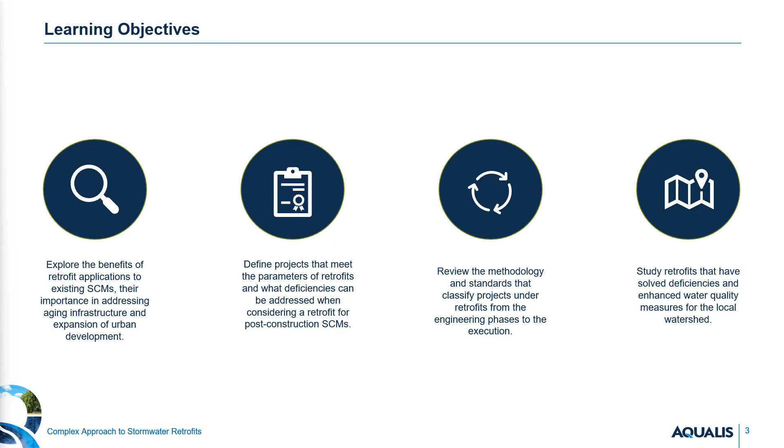Next, we will define projects that meet the parameters of retrofits, as well as what deficiencies can be addressed when considering a retrofit of post-construction stormwater control measures. We will then review the methodology and standards that classify the projects under retrofits, from the design and engineering phases to the execution of the retrofit. And lastly, we will look at real-world case studies of retrofits that have solved deficiencies and enhanced water quality measures for the local watershed.

Before we start into the basics of retrofit, I would like to discuss the distinction between stormwater repair, rehabilitation, and retrofits, as well as preventative maintenance. Therefore, we will start by reviewing key repair and rehabilitation concepts, when they are required, how these differ from a retrofit project, and the expertise needed to enact each phase of the project.

Preventative maintenance is necessary to ensure proper stormwater system functionality, while mitigating the chance that property owners will need to repair or rehab their stormwater system. Routine maintenance will also ensure accessibility and regulatory compliance while meeting water quantity and quality requirements. A full assessment of a system's design should be implemented monthly, quarterly, or annually, depending on regulatory compliance as well as geographical implications.

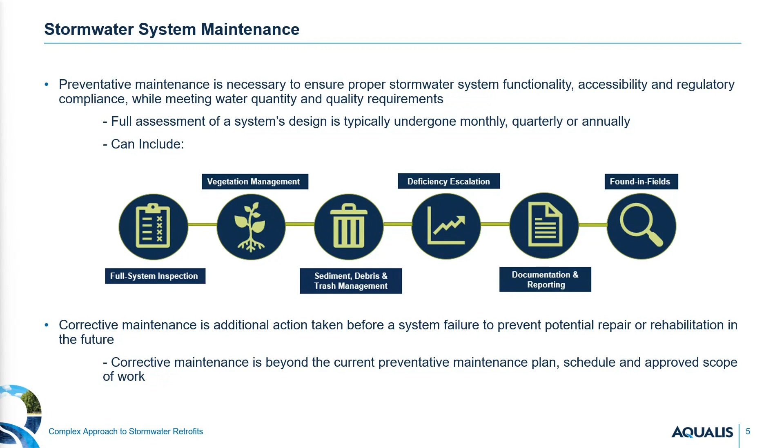Comparably, corrective maintenance is additional action taken before a system failure to prevent potential repair or intensive rehabilitation in the future. This type of maintenance is typically beyond a current system's preventative maintenance plan and will require an out-of-scope proposal to correct the identified deficiencies.

If a stormwater system is not properly maintained, it may require repairs or rehabilitation. A repair is usually due to a localized system failure or issue that requires out-of-scope planning and preparation to rectify. Based on damage severity, aging of the system's infrastructure, and frequency of component or system failure, a cleaning, patching, repavement, or component replacement may take place.

Conversely, a rehabilitation occurs at a system with a large-scale non-compliance issue, deficiency, or failure. A rehabilitation is most often needed when a system lacks proper maintenance over an extended period that results in improper functionality and operational deficiencies. Identifying the need for rehabilitation starts with a system inspection to assess its current state and functionality.

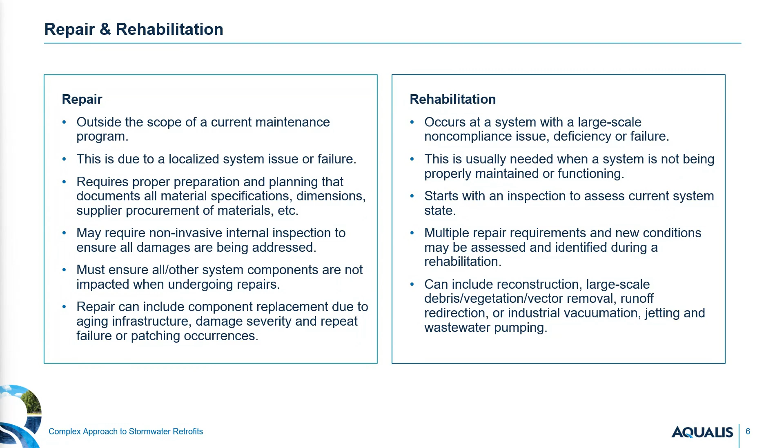During this inspection, multiple repair requirements and new conditions may be assessed. If a rehabilitation is recommended, it can include a large-scale system reconstruction, which consists of debris, vegetation, or vector removal, runoff redirection, or industrial vacuumation, jetting, and wastewater pumping.

Maintenance, as well as repair and rehabilitation, should be a collaborative approach carried out in conjunction with a certified stormwater professional. Professionals understand the engineering, regulatory, and ecological issues impacting stormwater systems and can tailor solutions based on these criteria. In addition, stormwater professionals will work with property owners to create, enact, and ensure a preventative maintenance program that meets the needs of your SCMs and complies with federal, state, and local regulations.

If repairs or rehabilitation are needed, stormwater professionals will utilize a comprehensive and innovative approach to restore and maintain system functionality and uphold O&M agreement protocols.

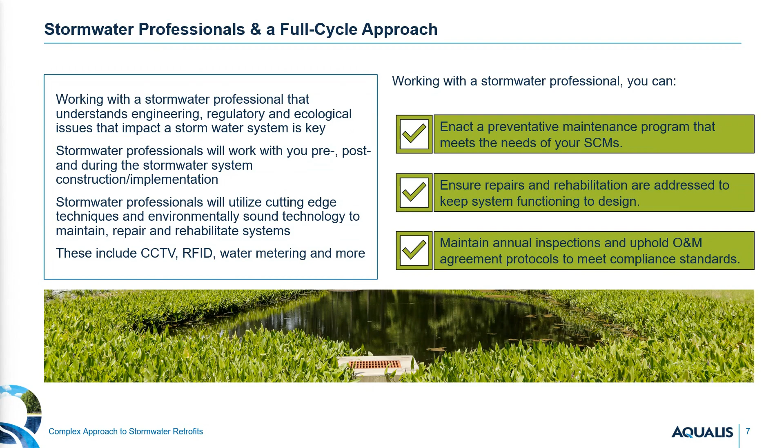Now that we have reviewed the key facets of repair and rehabilitation initiatives for stormwater systems, let's dive into the basics of what a stormwater retrofit is and the phases of retrofit and what impacts these types of projects.

A stormwater retrofit can take two paths: installing stormwater best management practices, or BMPs, in locations where they have not been previously implemented, or small-scale changes or redesigns to a part or parts of a stormwater system are made to allow for the installation of new, optimized water quality, runoff reduction, filtration, or retention capabilities.

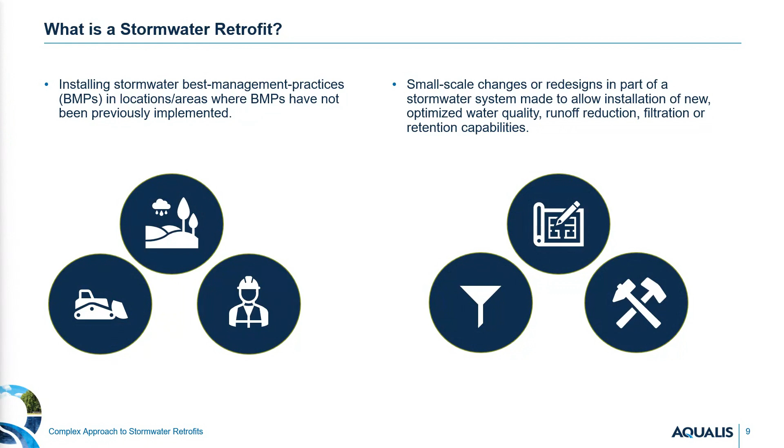Because retrofitting is a completely custom, one-off solution, the project must take into account several key aspects before a project is approved and a new design is implemented. As always, project and material costs play a large role in the extent of the retrofit and what can be accomplished. But geography-specific aspects, such as the availability of land to increase the size of or add the system, coupled with elevation, soil quality, and local terrain, play a large role in what type of retrofit can be achieved.

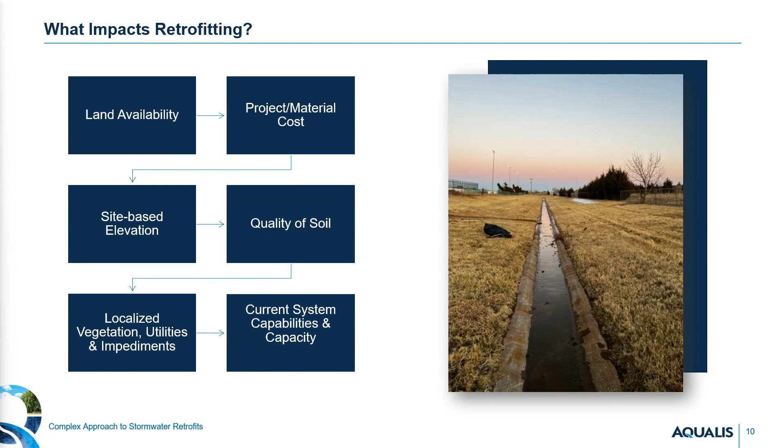To implement a retrofit, a project involves a series of actions necessary to ensure approval, intended functionality, and geographic impact. First, property owners will need to work with engineers to provide system studies that ensure the system's new intended capacity and drawdown meet design function for approval. Second, engineers will produce new, municipally approved plans. Once these plans are approved, a retrofit can be executed.

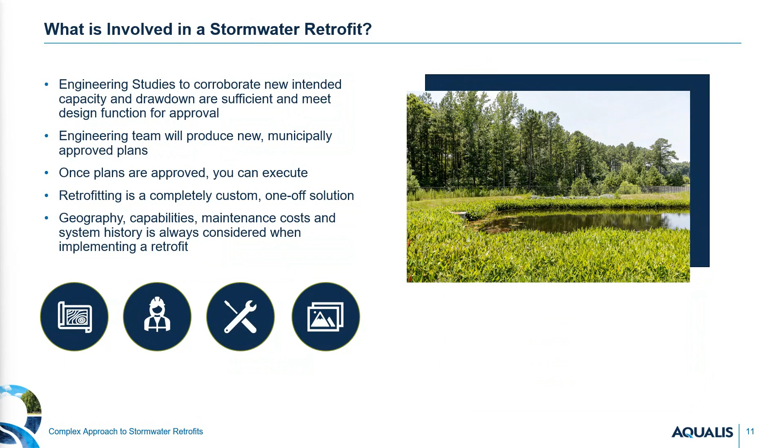In this next section, we will cover key considerations for retrofits, situations in which a retrofit project is necessary for a stormwater system, and real-life case studies where retrofits were implemented.

Retrofitting is commonly utilized to solve or mitigate flooding issues within a watershed. This is due in part to prior design deficiencies built into the original system or degradation in the system's intended performance. Geography factors heavily into the frequency and impact of flooding. Areas that are impervious in nature, such as parking lots and paved roads, cause stormwater to accumulate and run off. This is due to stormwater failing to infiltrate the surface, which results in the displaced water flowing over roads, parking lots, and other impervious infrastructure until it collects and stagnates in a low-lying area.

While the system itself and its location factor in how or why flooding may occur, climate can determine when a system may flood. In warm climates, flooding typically occurs most often during the rainy season, as stormwater runoff accumulates at a greater rate and is displaced. However, we are seeing, due to climate change, the frequency of these increase significantly.

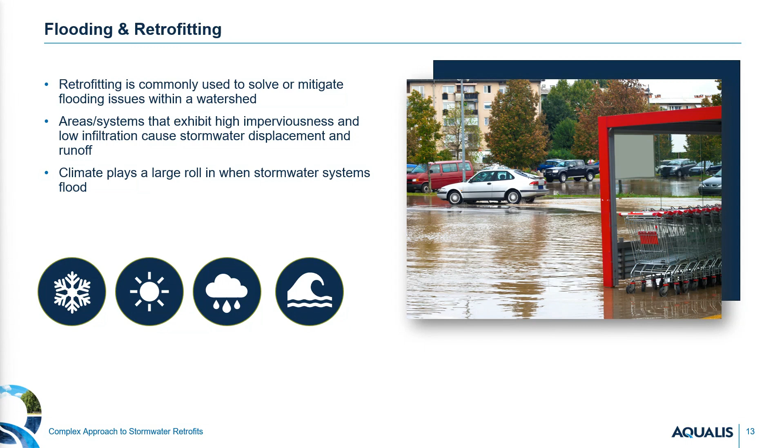In colder climates, flooding frequently follows the spring snowmelt, as temperatures rise and runoff from the mass accumulation of snowmelt flows into nearby drainage systems and bodies of water, overflowing the area. This type of flooding can also include a high concentration of pollutants, sediment, and debris that are harmful for stormwater systems and the surrounding area.

Increases in extreme weather events are prevalent across the nation, including significant flooding in certain geographies. But what are the key impacts it has on the surrounding stormwater assets? For a stormwater system, flooding can result in a number of failures, including clogged catch basins, cracked piping, vegetation destruction, and drainage issues. Infrastructure surrounding the system is also at risk. Structure degradation and cracking can occur, as well as water seepage into surrounding buildings and undesirable locations.

If damaged systems are left too long without repair, dangerous sinkholes can occur due to subsurface erosion of foundational soil and sediment. Sinkholes are a critical safety threat and can lead to irreparable damage and bodily harm to residents and passersby. Safety risks are not exclusive to sinkhole formation either. Flooding itself can create a substantial risk of hydroplaning, car accidents, bodily harm due to falls, breeding of dangerous mold, and electrocution from exposed wires caused by flooding or debris.

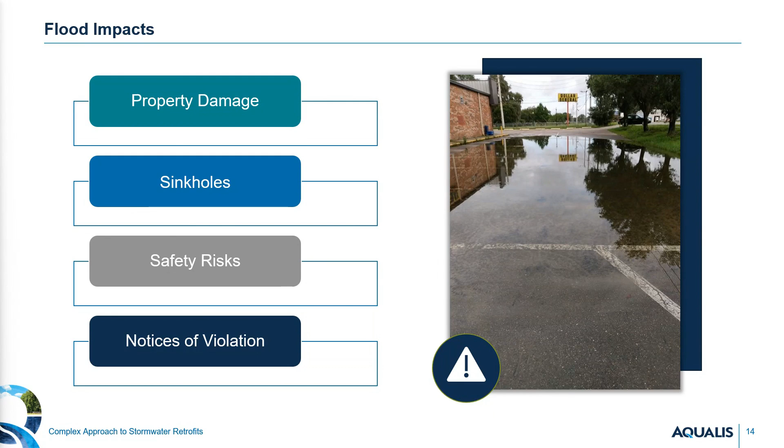Suffice it to say that if a system isn't functioning properly, or there is damage to it or the surrounding area due to flooding, property owners are at risk of receiving a notice of violation, or NOV. These are corrective orders and fines that local municipalities issue to property owners when their system does not meet compliance standards for operation. If a system is non-compliant, it is the responsibility of property owners to take corrective action to repair their system and restore it to compliance. Failure to do so can result in severe fines, sometimes daily, in addition to costly repairs needed to bring the system back to functionality.

Many times, retrofits are necessary to modernize existing systems when the volume of water increases due to growth in an urbanized area, which causes flooding. In Covington, Louisiana, a parking lot owned by a retail chain required a retrofit for this exact reason.

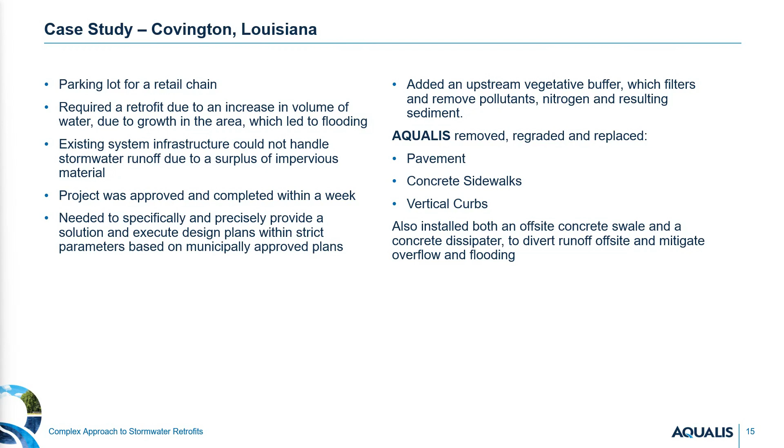A surplus of impervious material and an increase in stormwater runoff led to frequent bouts of flooding, which you can see on the photo in the next slide. AQUALIS provided a precise retrofit solution within strict municipal parameters to remove, replace, and regrade pavement, sidewalks, and curbs. AQUALIS also installed an off-site concrete swale and dissipator to divert runoff, while adding an upstream vegetative buffer.

Mitigating the serious effects of flooding starts with operationally efficient and geographically tailored stormwater system solutions. While stormwater systems are engineered and built to remove water from impervious surfaces and release it downstream, a stormwater system retrofit may be necessary for systems that flood frequently or have inadequate drainage. Retrofitting an existing system involves adding vegetation, porous soils and substrates, permeable pavements, and temporary storage tanks to improve water infiltration and slow stormwater runoff to prevent overflow and stagnant water.

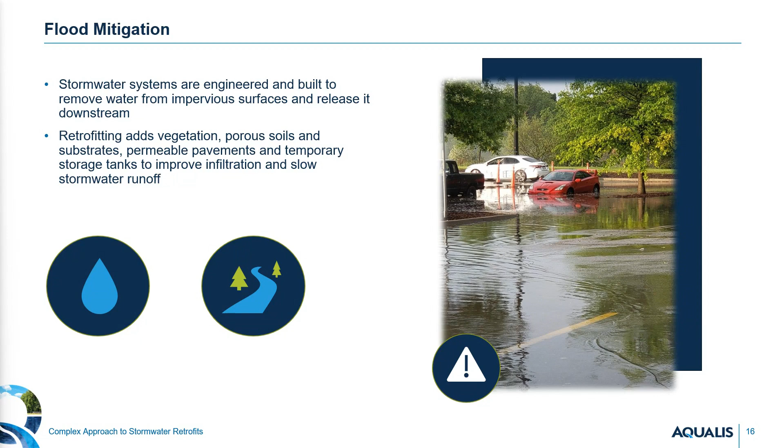Retrofitting can also be invoked to quell the impacts from erosion within and around the stormwater system. Erosion typically occurs in stormwater systems that have insufficient water volume capacity that causes the system to overflow or flood. It also occurs in improperly managed vegetation, leading to poor filtration, and those sites that have a lack of routine maintenance. Erosion can cause a series of cascading and critical impacts for both the system itself and the surrounding locale.

As a result of soil disruption, displacement, and sedimentation caused by erosion, natural landscapes and areas near a compromised stormwater system may experience destabilization, sinkhole formation, or a complete unsightly alteration. Water quality is also heavily impacted, as the presence of erosion is known to bring suspended solids in water, as well as lead to high water turbidity.

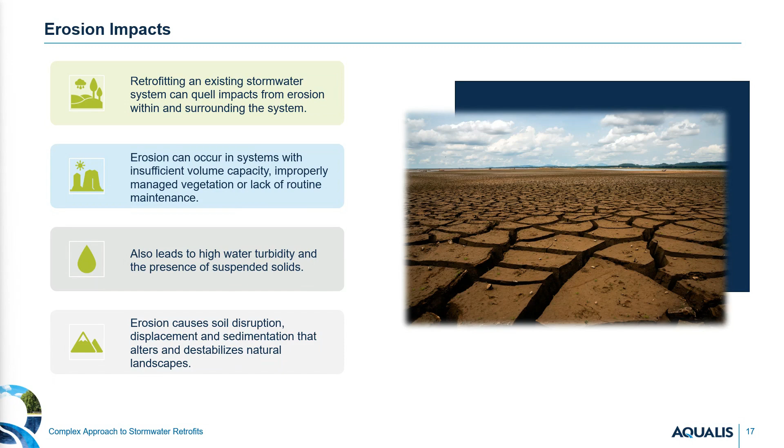The presence of erosion in a stormwater system or surrounding area has a few telltale signs that signal immediate action to property owners. Terrain-wise, the formation of indentations or noticeable paths in which water has broken down soil or sediment is a key indicator that erosion has taken place. Property owners may also observe noticeable soil loss or steep drop-offs. Additionally, property owners may also observe visual changes to water in and around the area. If water is cloudy, hazy, or filled with solids, corrective action will need to be taken.

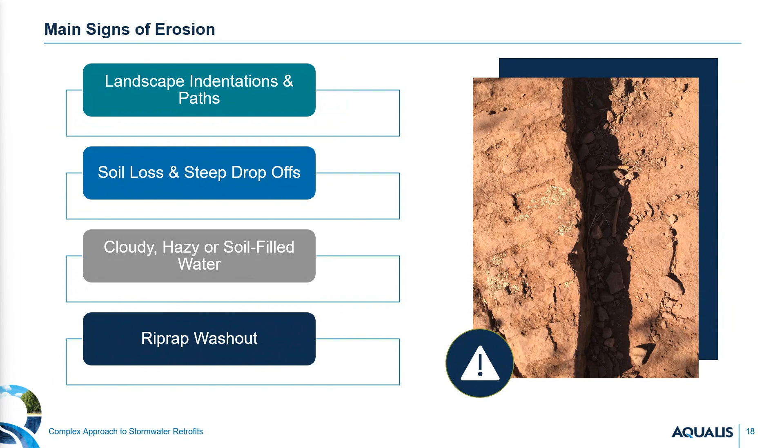A stormwater retrofit to mitigate erosion highlights stabilization, proper filtration, and proper filtration management. A retrofit will typically include adding vegetation, manufactured fabrics, and porous surfaces to slow water movement, promote manageable infiltration, and stabilize soil, which ensures indentation and drop-offs do not occur. When retrofitting and installing control measures, actively planning for a sediment regime and unintended effects of stormwater system functions can go a long way in mitigating channel erosion.

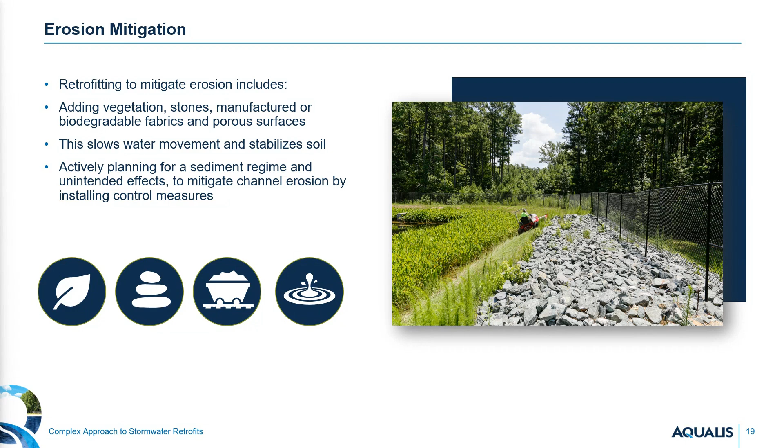If sedimentation is allowed to occur, a retrofit may be necessary to stabilize the stormwater system and restore proper functionality. In Lawrenceville, Georgia, a site owned by a hotel chain was not fully converted nor maintained by the developer. This resulted in sedimentation taking place in the forebay, causing destabilized soil in and surrounding the dry pond. Vegetation was also improperly managed, hindering proper filtration of pollutants and sediment. As beneficial vegetation died out, invasive vegetation took root.

To retrofit the system, restore adequate function, and mitigate increased runoff and sedimentation, AQUALIS conducted an existing site condition survey to confirm the existing design in relation to the original certified design. They then completed a retrofit of the system by removing sediment and installing a new detention orifice to benefit system drainage efficiency. Additionally, they refreshed and installed riprap while dewatering the system.

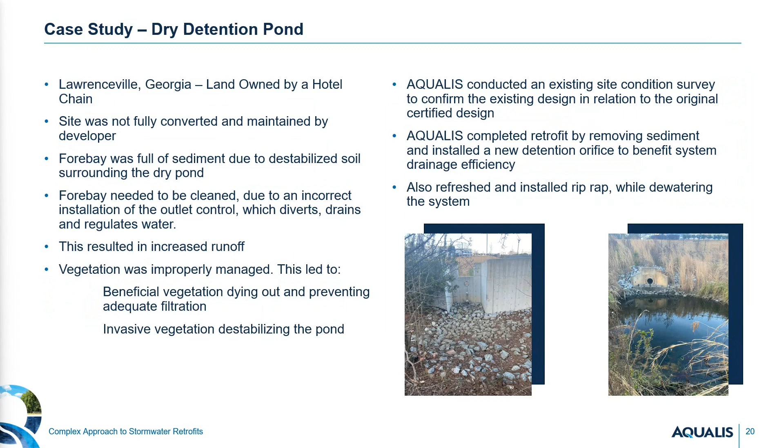When considering retrofitting a stormwater system, it is important to install stormwater control measures that not only mitigate risk and the threat of damages, but also promote sustainability for the surrounding environment. Traditionally, systems were designed to channel stormwater away from properties and infrastructure, with an emphasis on engineered systems built with concrete to achieve this goal. This is known as gray stormwater infrastructure and is exemplified by the use of levees, reservoirs, and stormwater drainage systems.

Recently, however, a more conservational and environmentally sound SCM called green stormwater infrastructure has been coined and added to traditional gray stormwater systems to promote sustainability. Green stormwater infrastructure centers on mimicking natural hydrological processes to retain, transfer, filter, and drain water. To do so, green stormwater infrastructure utilizes and implements vegetation, porous soils and substrates, permeable pavements, and temporary storage tanks.

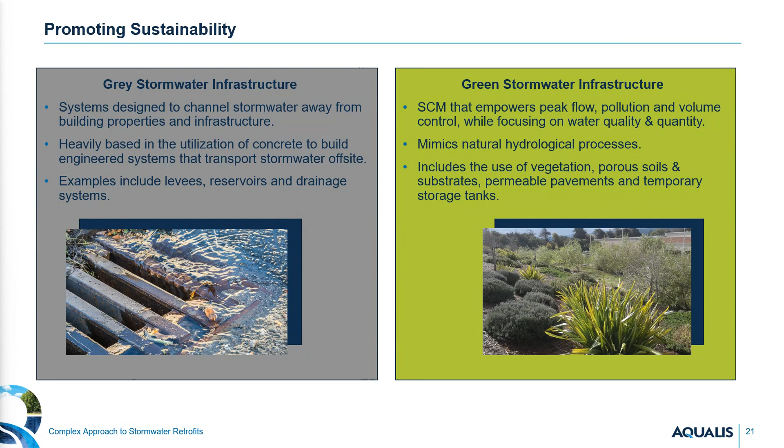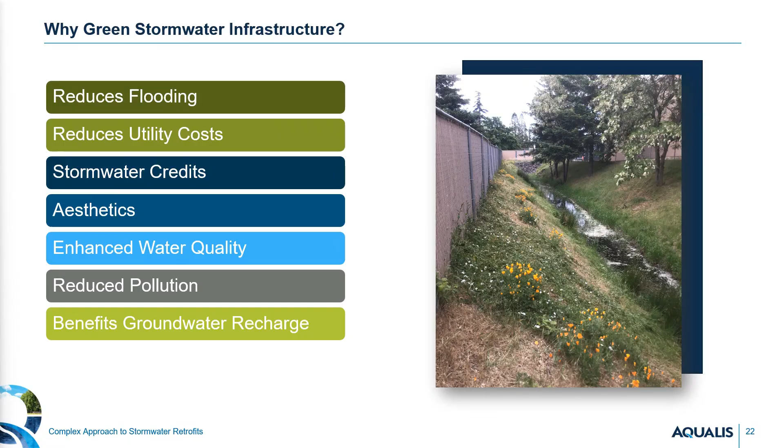Aesthetically, the use of plants and greenery benefits the surrounding area, while making the system more pleasing to the eye. Functionally, these plants help to filter pollutants and sediment from stormwater runoff, enhancing water quality and removing a good amount of pollutant from the locale. In our next section, we're going to be discussing a number of commonly implemented stormwater retrofit projects, use cases, and benefits for property owners.

A simple yet highly effective retrofit deals with swapping out impervious pavement or surfaces with porous options. Impervious pavement prevents water from infiltrating the surface beneath and instead diverts it as runoff through and out of the system. This type of surface or pavement makes up a large percentage of urban infrastructure within the United States, with parking lots and roads largely constructed with impervious material. Porous, otherwise known as pervious pavement, allows water to infiltrate the soil beneath the structure. This helps filter the water naturally and decreases the ability for pollutants to be carried to larger bodies of water as runoff.

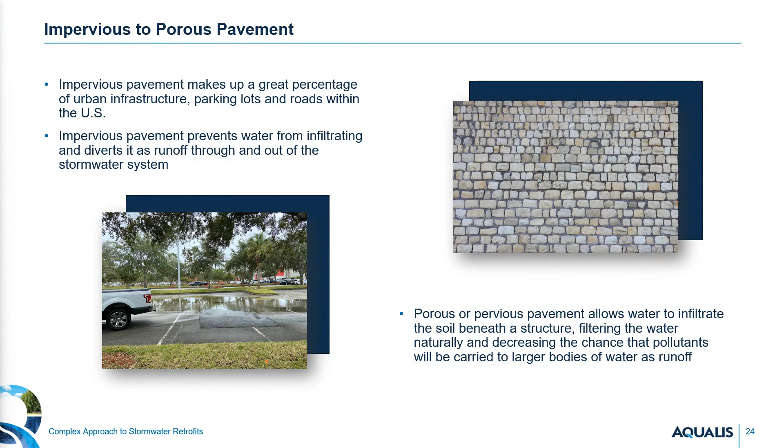While impervious pavement may currently make up the majority of roads and parking lots, it imparts several challenges for property owners and the surrounding area. Due to water being unable to filter into the surface below, this pavement enables standing water that can lead to drainage issues, flooding, system deterioration, and pollution runoff that makes its way into aquifers and seeps into groundwater when displaced. Retrofitting a stormwater system with pervious pavement reduces standing water and prevents common drainage issues. This is due to the pavement enabling water to travel naturally, which allows the water table to recharge and gradually helps water to dissipate and filter through the soil underneath the pavement. This also prevents sediment and pollution runoff.

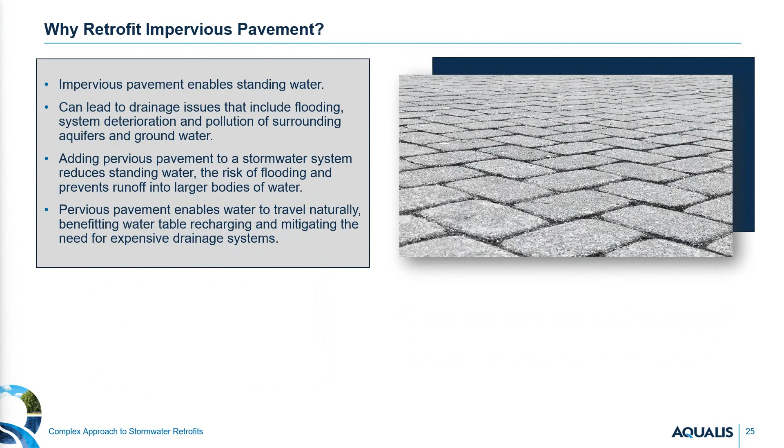In many cases, property owners will seek to convert a dry pond to a wet pond based on past performance and the surrounding terrain. A dry pond is primarily designed to hold and discharge water from rainfall events, but remain dry in between. These ponds will typically hold water for 48 to 72 hours before being discharged. Conversely, a wet pond is designed to hold water permanently while releasing captured water over 2 to 5 days via an outlet structure. While dry ponds can filter and remove sediments and pollutants, wet ponds have added vegetation to enhance water filtration and boost hydrological processes in the surrounding ecosystem.

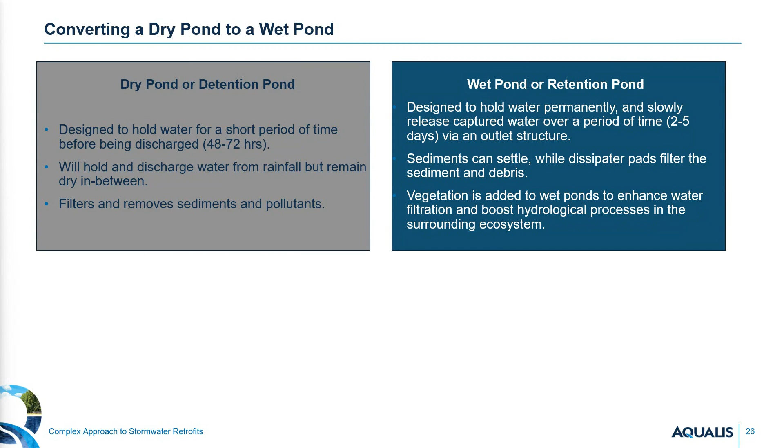Converting a dry pond to a wet pond is one of the most common retrofits seen today. Dry ponds, while easy to maintain and build, are found to be largely inefficient for many property owners, with a large list of negative impacts. Typically, dry ponds have a high water table that decreases the effectiveness of both filtration and drainage. This leads to dry ponds overflowing after rain events and flooding the surrounding areas. Retrofitting a dry pond will focus on resizing a pond while adding capacity and converting the pond to a retention pond to handle an increase in runoff and water storage or to mitigate overflow. As part of the retrofit, vegetation can be added to enhance pollution and sediment removal, along with a sediment forebay.

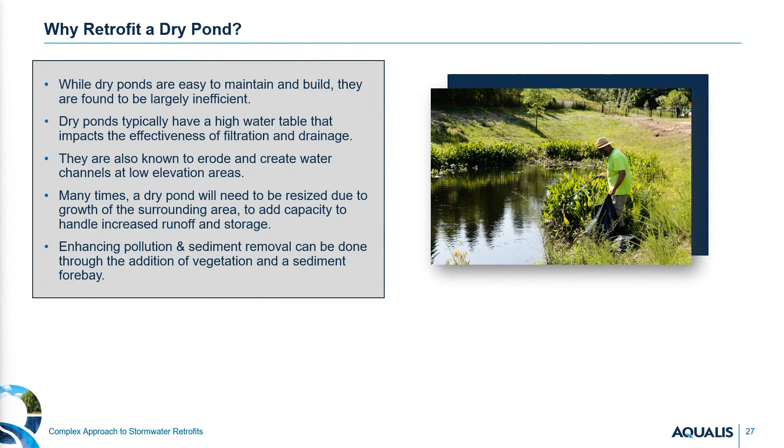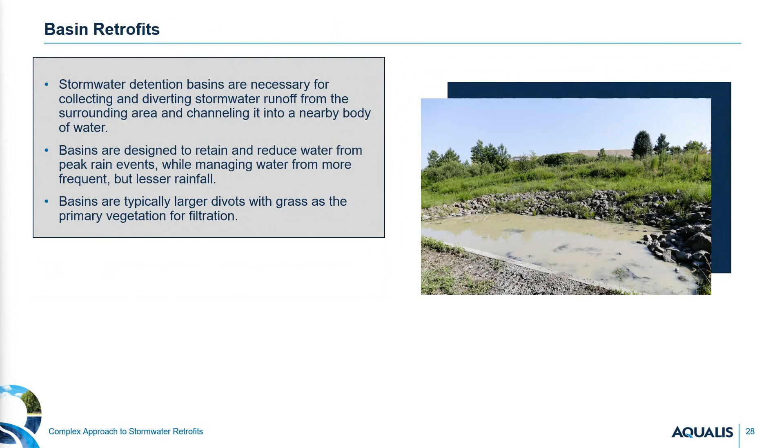Basins are another stormwater system that may require retrofits to optimize system function. These are typically larger divots with grass as the primary vegetation used for filtration. Stormwater detention basins are built to collect and divert runoff from the surrounding area and channel it into a nearby body of water. They are designed to retain and reduce water from peak rain events while managing water from more frequent, lesser rainfall. Basins are known to lack proper sediment and pollution filtration. They are also inefficient at discharging stormwater runoff from smaller, more frequent rainstorms, which results in sedimentation, erosion, water pollution, and flooding. Retrofitting a basin involves adding vegetation to increase filtration, efficiency, and water retention, as well as adding infiltration measures to better manage and retain runoff.

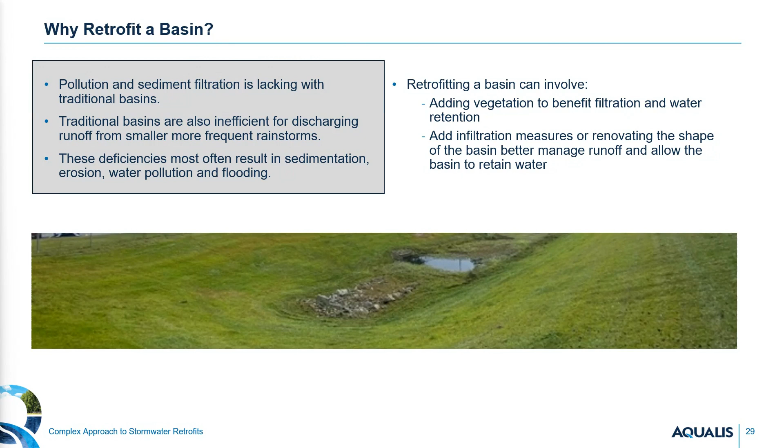An environmentally conscious and beneficial approach to create a sustainable stormwater system is installing a green roof. I did see a question come in around what examples of green retrofits are, and this is one of them. A green roof is a thin structure that partially or fully covers an area located on the roof of a building, either suspended or as part of the actual structure. They contain a layered system of plants, drained membranes, and tapered insulation that transforms an impermeable surface into a porous surface.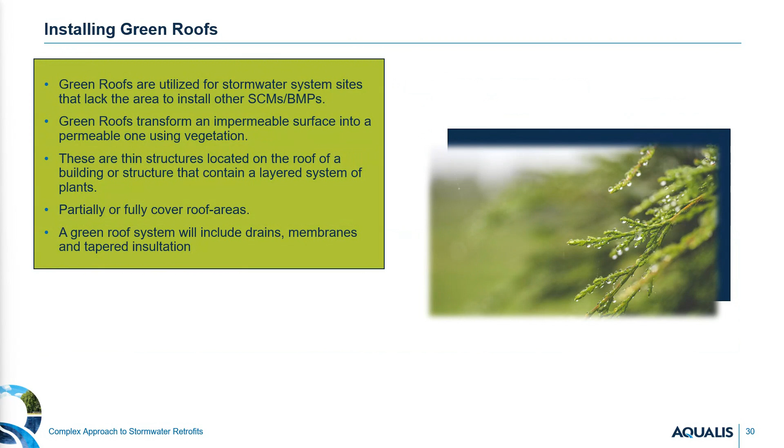Retrofitting a system to include a green roof offers a number of key benefits brought about by weather and drought-tolerant plants, allowing for nourishment of roof vegetation. Green roofs support absorption of stormwater versus running off the impervious roof structure and directly impacting the stormwater system, significantly reducing the volume of stormwater exiting the developed site.

Because stormwater is absorbed and discharged at a slower rate, drainage systems are left with a lighter workload, benefiting system functionality and longevity. This also allows for the filtering and proper discharging of carbon dioxide, pollutants, and nitrates. Green roofs are also very low maintenance, as they are known to be highly self-sustaining while imparting energy savings on the local weather patterns and decreasing stormwater utility fees due to lesser workload.

There are a number of additional sustainable benefits of retrofitting your existing flat roof with a green roof, including site energy savings, reduction of greenhouse gas emissions, and reducing the urban heat island effect. I don't have a slide for it in here, but another option for a retrofit, which can be used on green roofs as well as in stormwater ponds, is pollinator gardens.

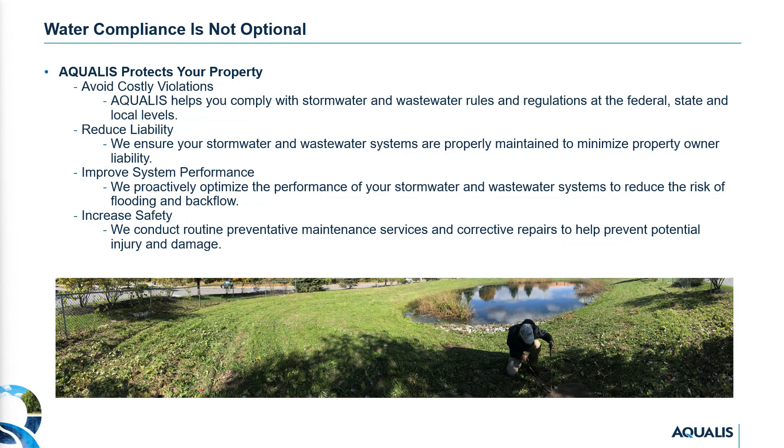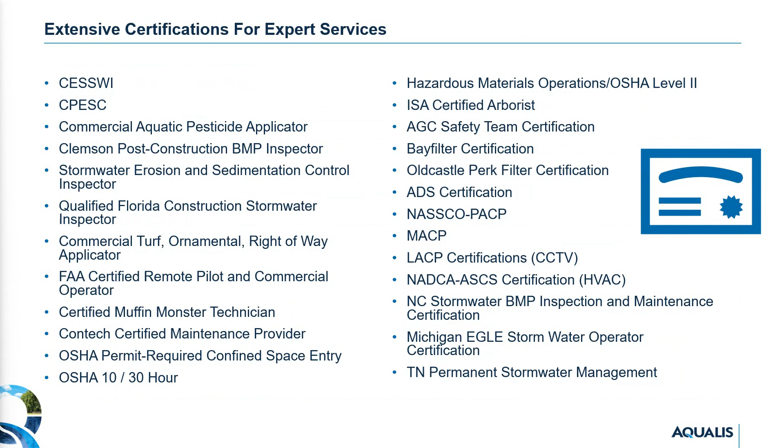And I went through this much too quickly today, so I am actually through with my presentation, and we can jump into questions. Thanks so much, Erin. We do have a couple questions.

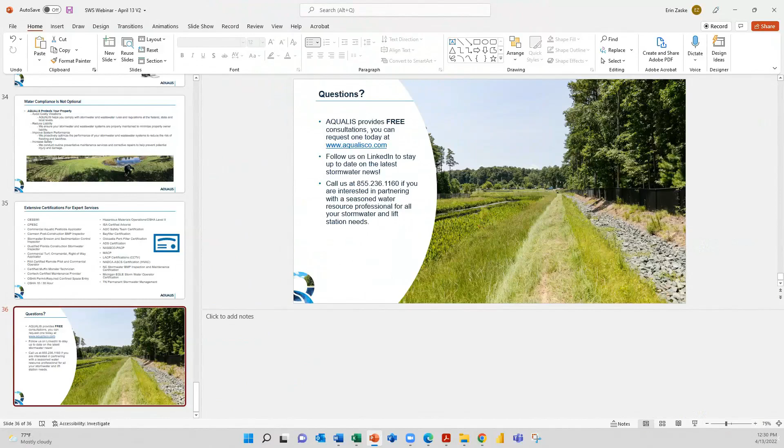So the first one I will start off with is, how are property owners around the United States moving from gray infrastructure to green initiatives, and how does that vary by geography? Yep. So we actually have a number of clients who are looking for this transition right now. So, green roofs are a great option. We're seeing a lot of that throughout the Midwest. In the Chicago area, we're seeing quite a bit of it, as well as in Michigan and Indiana.

We are seeing a lot of pervious pavement in the parking lot. It is a pain to maintain when you switch from impervious to pervious, because typically parking lots are used to the street sweepers coming in, and those oftentimes jumble up the pervious pavement, but there are different ways to maintain that. It is a great option to start moving into green infrastructure as a whole. And then we're seeing some of the

I lived in Houston for a long time, and if you think of the bayous, the stormwater bayous that go through Houston, they were just a lot of concrete. And Houston has done a lot of work to turn those into green assets. They still have the concrete at the way bottom, but they've now taken out some of the concrete, made vegetative slopes there, introduced biking and running paths. So there are a number of ways that you can move from gray infrastructure to green.